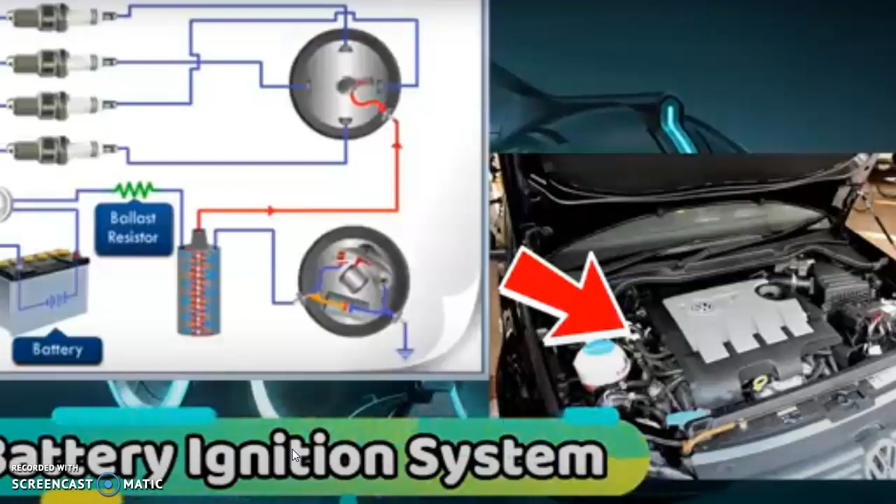In my previous videos we already completed chapter 1 and chapter 2. Let's start with the third chapter, named ignition and suspension system. The first article is battery ignition system, that means its description with working principle. Let's start today's class.

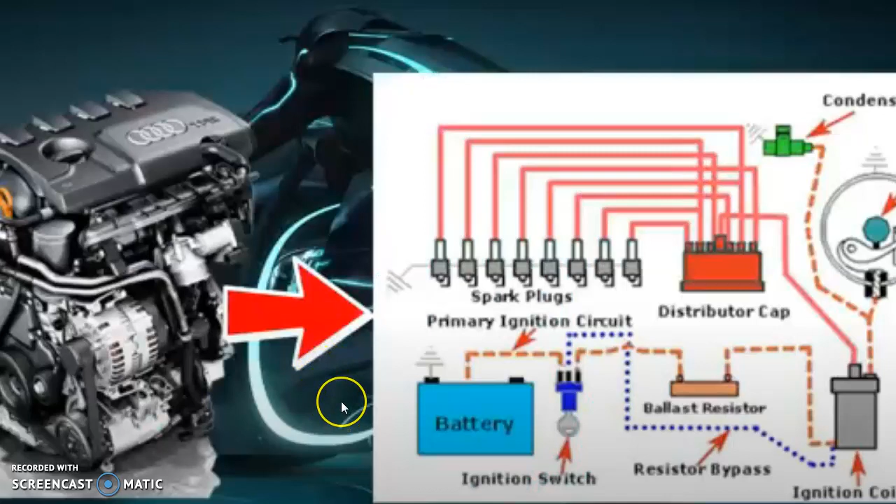The main parts of the battery ignition system are covered in today's video, along with its advantages and disadvantages. This battery ignition system is extensively used in modern automobiles, almost all passenger cars, heavy trucks, light trucks and motorcycles.

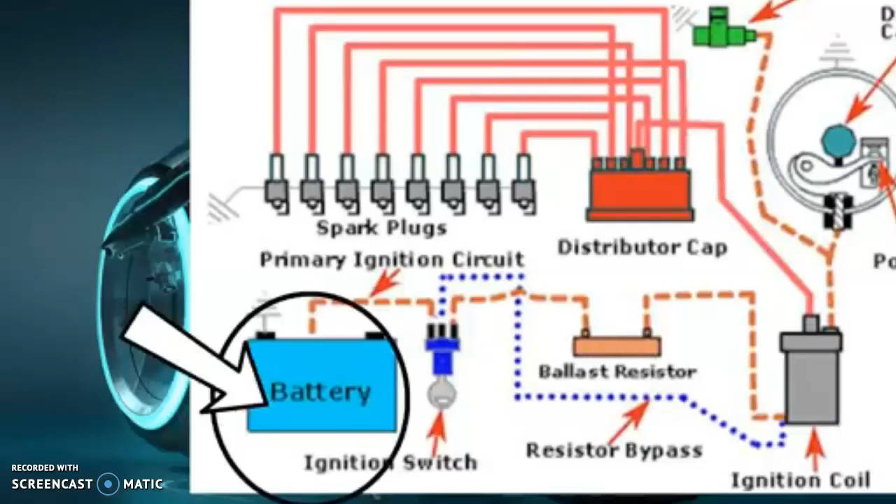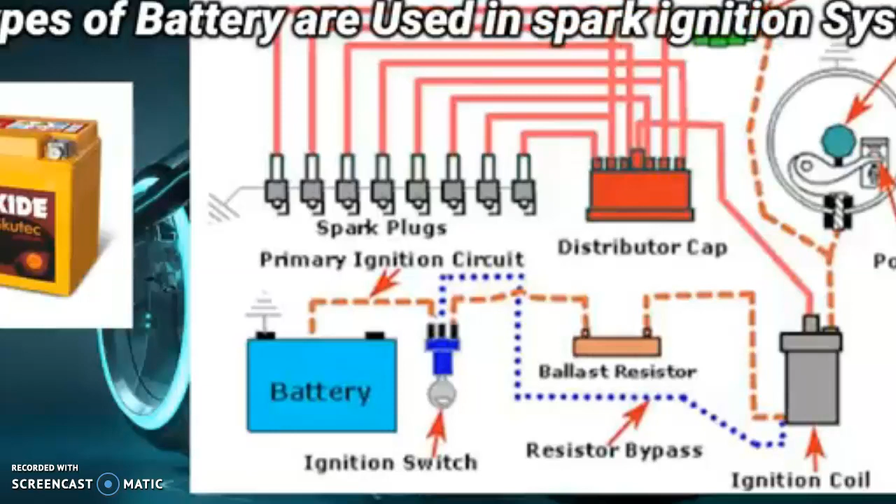What are the main parts of the battery ignition system? The first and very essential item is the battery. The battery is the storage of electrical energy, which is recharged by the dynamo. It converts chemical energy into electrical energy. Two types of battery are used: dry cell and wet cell.

The next component in the battery ignition system is the ignition coil, which is connected through the ignition switch. We use this ignition switch for connectivity. When we switch it on, it directly connects to the battery.

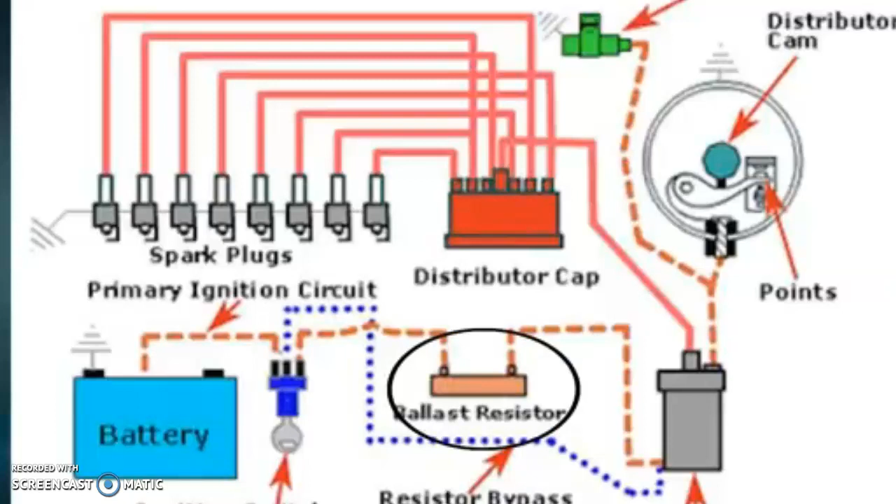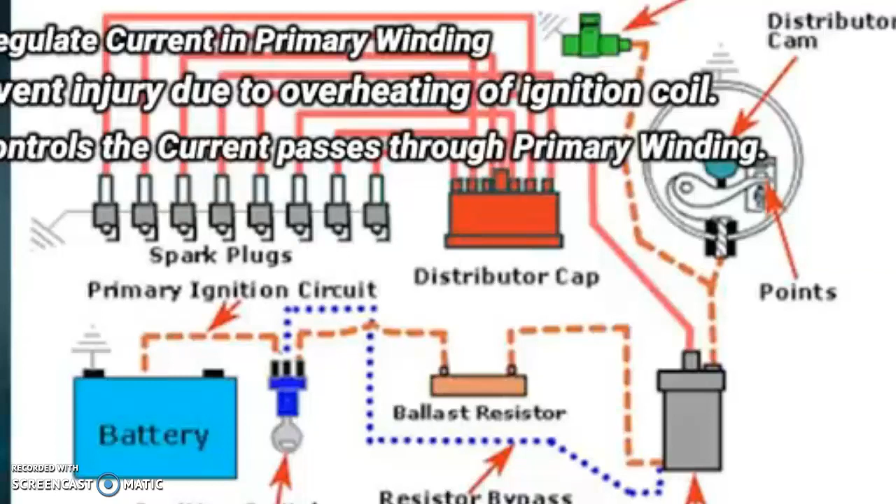The next component is the ballast resistor, used for overheating purposes. It is a safety feature to regulate the current in the primary winding and prevent damage due to overheating of the ignition coil. It controls the current passing through the primary winding, so it has a resistor.

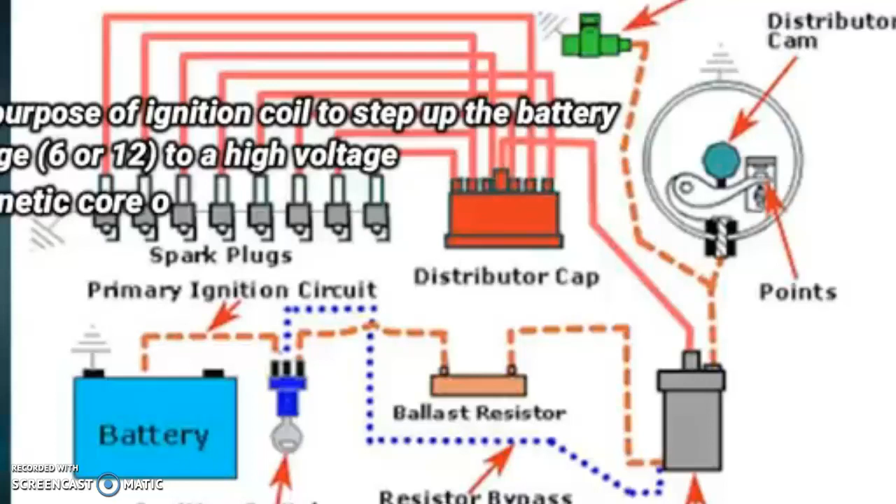Then we are using an ignition coil. This is a very essential element and the main component of the battery ignition system. The purpose of the ignition coil is to step up the battery voltage, either 6 volt or 12 volt, to a high voltage.

This magnetic core has a primary and it has two windings. In the battery ignition system, the ignition coil stores energy in the form of a magnetic field and delivers it at the instant of ignition in the form of high voltage and current, which passes through the high tension wire to connect the spark plug.

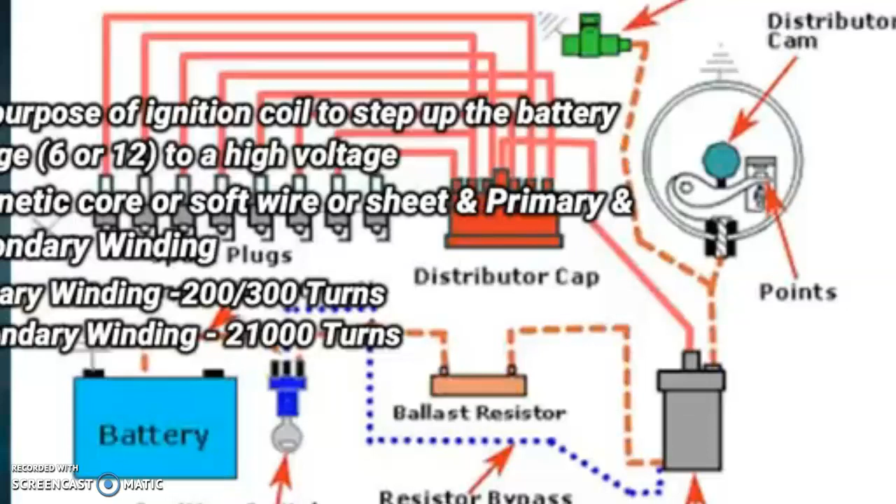This is the diagram of the 4-cylinder battery ignition system. So how is it used? Let us discuss how it actually works.

First, low voltage current flows from the battery to the primary coil through the ignition coil switch and the ballast resistor. The ballast resistor regulates the temperature of the ignition coil by regulating the current passing through it.

The ignition capacitor connects in parallel with the contact breaker. One end of the primary winding is also grounded through the contact breaker. When the ignition switch is closed, the primary winding of the coil is connected to the positive terminal and current flows through it, known as the primary circuit.

The current flowing from the battery through the primary coil produces a magnetic field which induces an EMF in the secondary coil. The cam regulates the contact breaker. Whenever the breaker opens,

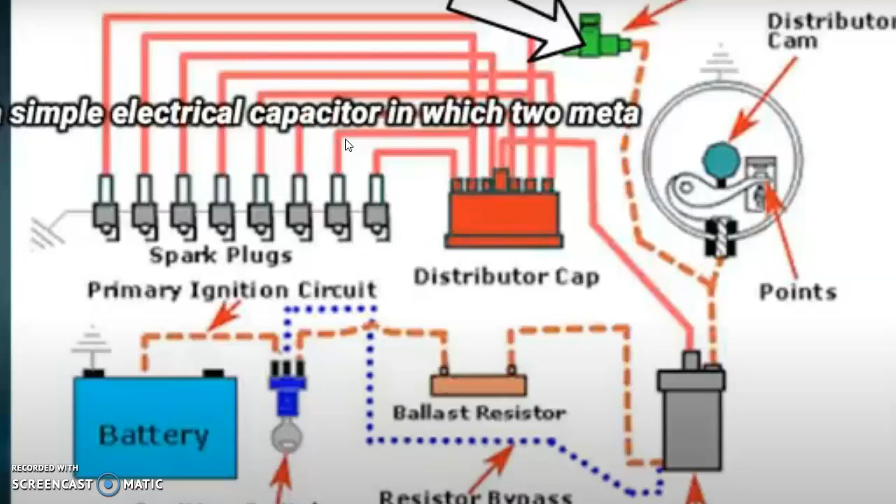Now this high voltage EMF produces a spark at the correct spark plug through a distributor. So this is the function of this system. As per your course, this is a diagram of the battery ignition system used in a

4-cylinder inline engine. Here we can say the spark is generated in sequence, such as 1-3-4-2. That means whenever current is sent, the spark is generated in the respective spark plugs in order to create the ignition.

So what is the function of this? The spark plug is used to generate the spark inside the engine to fulfill the requirement of combustion.

Now let us discuss some advantages of the battery ignition system. Advantage 1: at the time of starting or at low speed, good spark is available. Advantage 2: the battery used to generate spark can also be used for auxiliary loads like headlight, tail light, etc. That means the battery can be used for multiple purposes.

Advantage 3: initial expenditure is less and it has low maintenance cost, since the life of a battery is maybe 3 to 4 years. Advantage 4: the ignition system is not affected when adjusting spark timing in the battery ignition system. These are the four advantages.